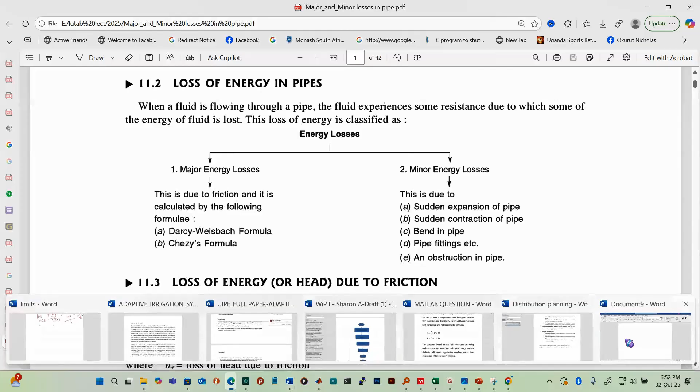So I'm talking about losses in the pipes. We have major losses, and we have minor losses. Under major losses, these are due to friction, and we use Darcy - Darcy-Weisbach and Chezy's formula.

Then under minor losses, we have loss due to sudden expansion, loss due to sudden contraction in the pipe, loss due to fittings, the bends, and obstruction, etc.

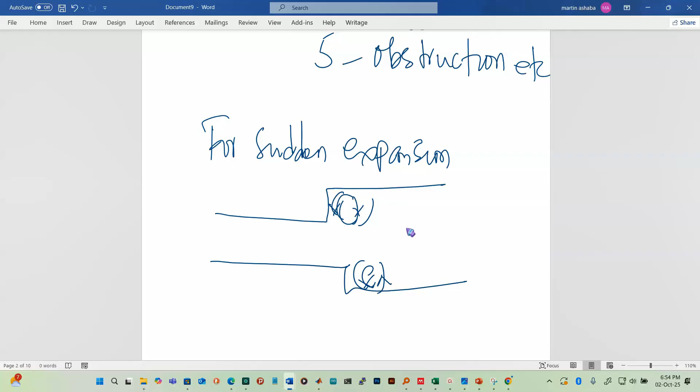Now for sudden expansion, you have a pipe coming smaller, then it suddenly expands. When it suddenly expands, it creates what we call eddies - the swirling of the fluid rotating around and falling back. These eddies result into what we call head loss, called head loss due to sudden expansion.

After these losses, finally the fluid will follow its normal profile - this is the flow direction. Then when we talk about sudden contraction, it is just the reverse of this: you'll have a pipe coming big, then it suddenly reduces in dimensions.

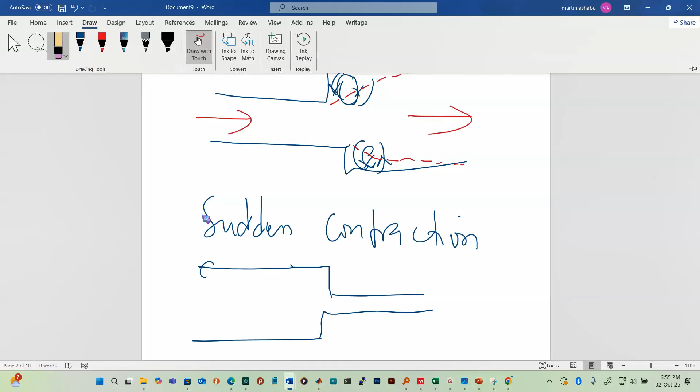So let me redraw this. Because of the eddies, because of this obstruction, the fluid will hit here and then falls back. So somehow it creates what we call a vena contracta. Around here you have what we call eddies - these are eddies, and you also have eddies here. This is the direction of flow.

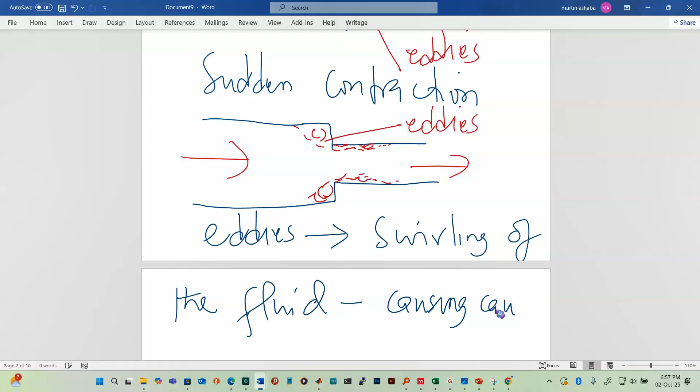So the eddies come from the swirling of the fluid, causing flow to rotate around here, causing rotational flow, which further leads to losses.

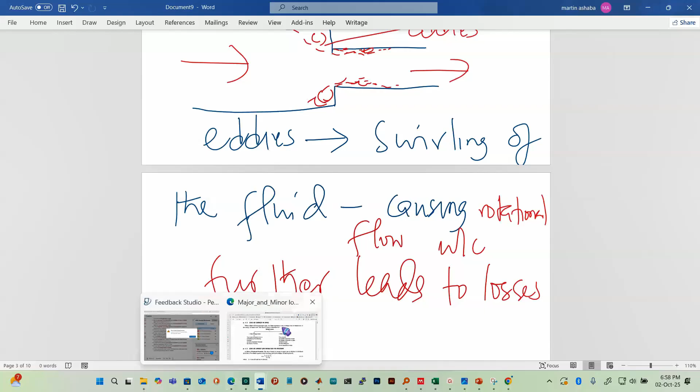We shall later see how to calculate the head loss due to sudden expansion and head loss due to sudden contraction. In studying this, we'll basically talk about heads, because application of Bernoulli's equation gives us the heads of the fluid. Energy is represented in terms of heads of energy - how much energy the fluid carries from point to point is experienced in terms of H, in meters. Later you can convert it into joules and also watts.

So let's look at the loss of energy due to friction, and look at the Darcy-Weisbach formula. It is given by HF, the head loss due to friction, equivalent to 4 times F times L times V squared divided by D times 2G.

So we are talking about Darcy-Weisbach, which gives us the head loss due to friction, given by HF equals 4 times F times L times V squared divided by D times 2G.

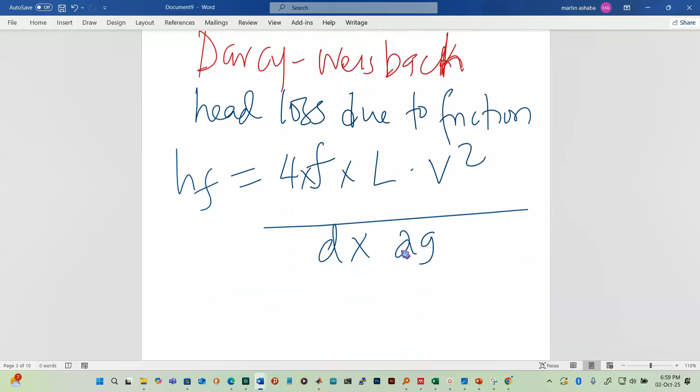So that means we can be able to obtain the head loss if we are given the length of the pipe. So L is the length of the pipe portion.

F is what we call the friction factor. And this friction factor is a constant for a given pipe material, such as HDPE, GI, PE, PVC, and GI. But also these are defined by other factors that could determine this friction factor, but in most cases it depends on the plastic material or the material of the pipe itself.

We can look at maybe, let me get one here. So we can say friction factors.

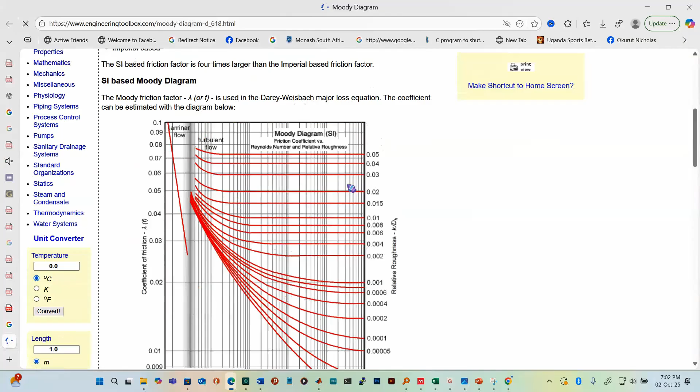So we will look at what we call Reynolds number. Reynolds number, in most cases, is just a dimensionless constant that is used to determine whether the flow is either turbulent or laminar. It gives us a ratio of the inertial forces to viscous forces, and that's what we use to predict whether the flow is going to be laminar or turbulent.

So let me check here. Let's see.

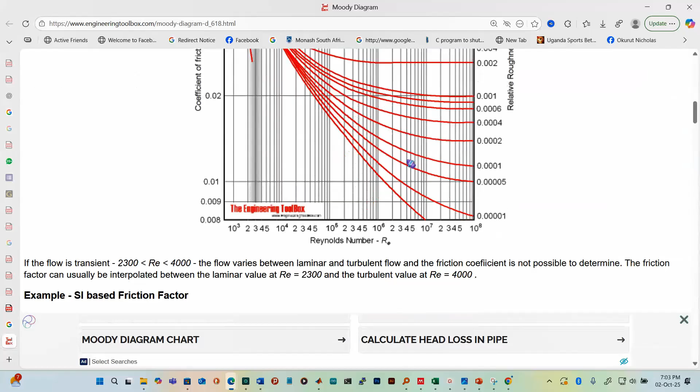When you check on this graph or chart, if, for example, you want to determine the friction factor, you will first have to look at the Reynolds number. If the Reynolds number is in powers of 10 to the power 3, then it will be between this and that. So this is likely to be, let us say, maybe 3,000. Let us maybe take 5,000, something like that.

So you move, and if you move, you will find that this flow is a turbulent one. And then you're supposed to look at the horizontal line. The horizontal line is actually what is giving you the coefficient of friction.

Then the roughness is actually what was given by some constant divided by the diameter of the pipe. So the value that you pick on this other side, like now if I was to pick the friction factor for this from 5, I would move up.

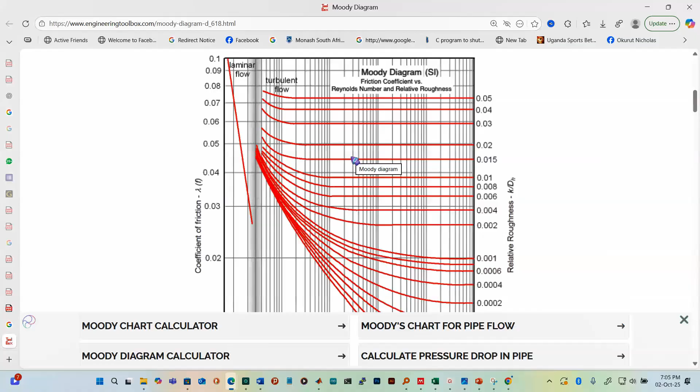So let's go back. So that is exactly what we use. And then L is known, V is the fluid flow velocity, and D is the diameter of the pipe, then G is the acceleration due to gravity.

So we can go ahead and say V is flow velocity, D is the diameter of the pipe, and then G is the acceleration due to gravity.

So that one is done. The Reynolds number, as we said, we need to write the Reynolds number.

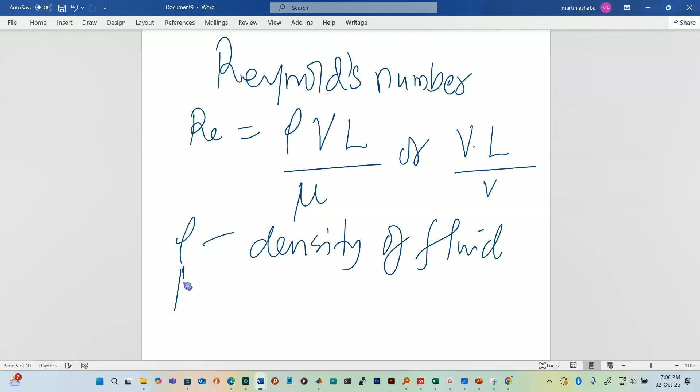So we said the Reynolds number, RE, is given by rho V L divided by mu, or we can also say it is V times L divided by small v, whereby rho is the density of fluid, mu is what we call the dynamic viscosity of the fluid, which determines the ability of the fluid to oppose any shearing forces against that fluid. This viscosity is the internal fluid friction, which determines the capability or capacity of the fluid to resist any shearing forces. Then this small v,

Let me write it properly.

The small v is what we call the kinematic viscosity, and this kinematic viscosity is given by dynamic viscosity out of density of the substance. Then this big velocity, big V, is the velocity of the fluid.

Now, if this Reynolds number is less than 2000, we call this laminar flow. And this is always done for pipe flow, so we can use these dimensions to determine the Reynolds number.

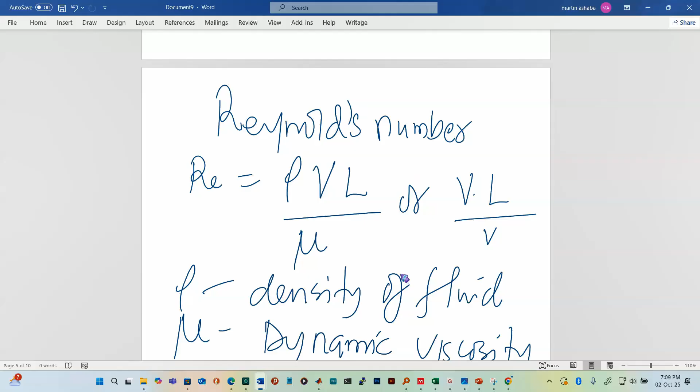Next, if the flow has a Reynolds number above 4000, then we call this turbulent. If the flow is having Reynolds number between 2000 and 4000, then it will have both laminar and turbulent characteristics. So I've talked about that. In the future, if you meet that kind of scenario, just remember what we have said.

So, less than 2,000, then we have what we call viscous flow, but in most cases we call it laminar. If it is above 4,000, then we call it turbulent.

Okay, so let's talk about Chezy's formula. And Chezy's formula is also simple. So let's talk about number 2, Chezy's formula.

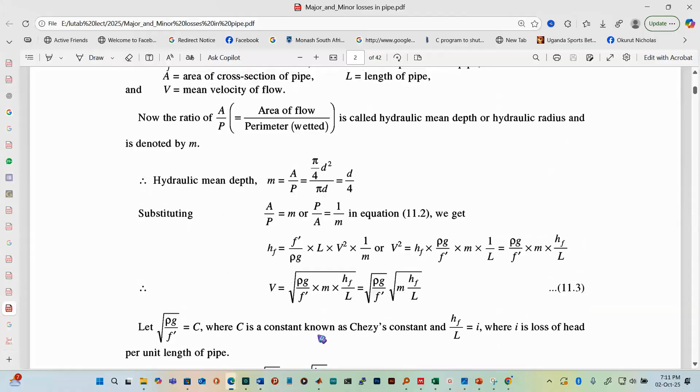This Chezy's formula is none other than HF. It also gives us head loss due to friction in pipes, and is given by HF equals F prime times P out of A.

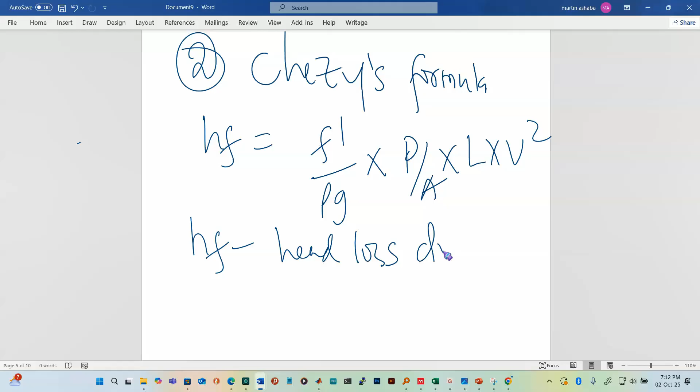So we are saying this HF will equal F prime divided by rho G, multiplied by P out of A, times L times V squared. Now we have to remember that HF is head loss due to friction.

We are saying that Chezy's formula is given by HF, which is equivalent to F prime divided by rho G, multiplied by P out of A, multiplied by L times V squared. And we said HF is the friction head loss, or head loss due to friction.

Next we know that rho G is the specific weight of the fluid. Next is that P is, no, P is not pressure, it is the wetted perimeter. It is called wetted perimeter.

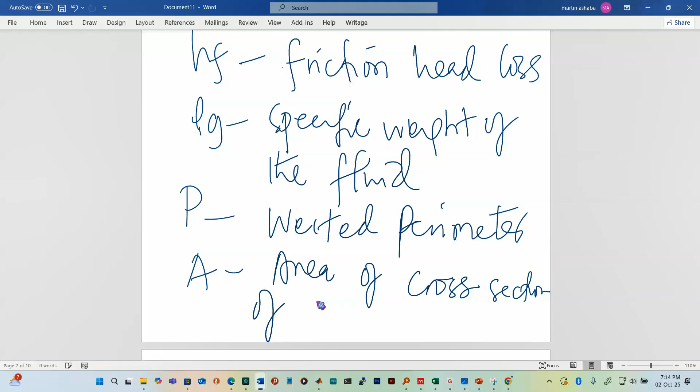Next is that A is actually what we call the area of cross section of the pipe. So L is the length of the pipe.

Now A out of P is what we call hydraulic mean depth, or hydraulic radius, and in open channel flow and in all others we always denote it by M.

So we need to also define this F prime. Any question? No. So we need to define also this F prime. F prime is also a friction factor, but it is calculated by other quantities. I'm trying to find a way how we can calculate that constant.

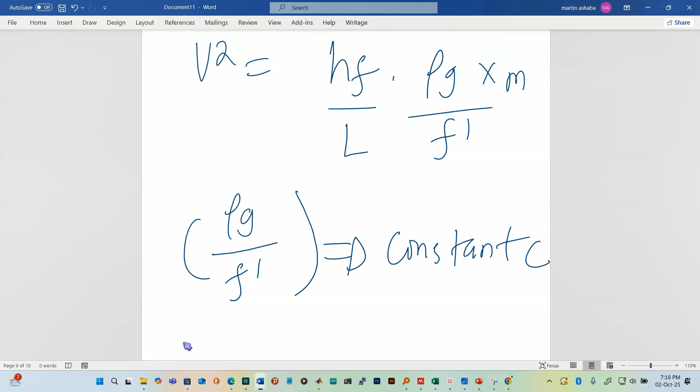We know this rho G out of F prime is actually going to be a constant C, which we call Chezy's constant.

And then this component HF out of L is equal to I, and this is given by head loss per unit length. So this becomes head loss per unit length of the pipe.

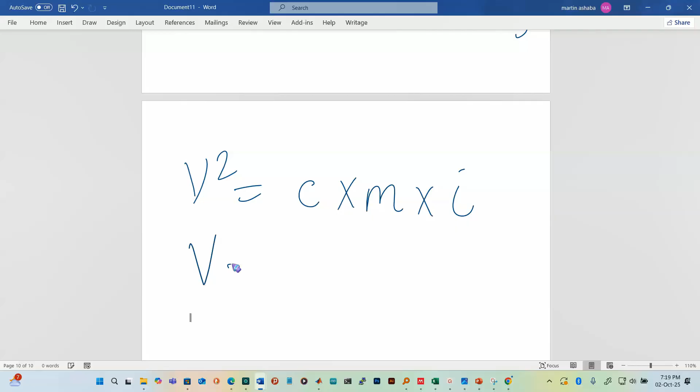And finally, if we know that V squared is equal to C times M times I, then that means V is going to be the square root of C times square root of M I. So this is still a constant C, and therefore we can say... let's create more space here.

So finally, what we call Chezy's formula. Chezy's formula is V equivalent to C times square root of M I, whereby M we called hydraulic mean depth, which is equal to some value. And that value is wetted area over wetted perimeter, so area of cross section over wetted perimeter.

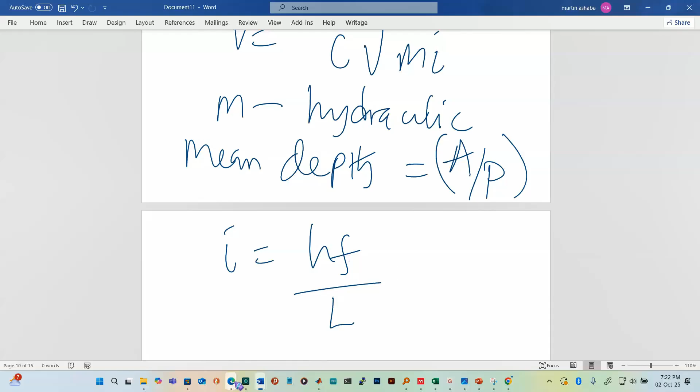So from here, look at this example. Find the head loss due to friction in a pipe of diameter 300 millimeter and a given length, through which water is flowing at a velocity of 3 meters per second. Using that formula, you would use 4 times F times L times V squared divided by D times 2G.

So in this formula, they want you to use V, which is the kinematic viscosity. If you are to use it, you would need to calculate what we call the Reynolds number, and after getting the Reynolds number, you can get the F. Anyway, this was given here.

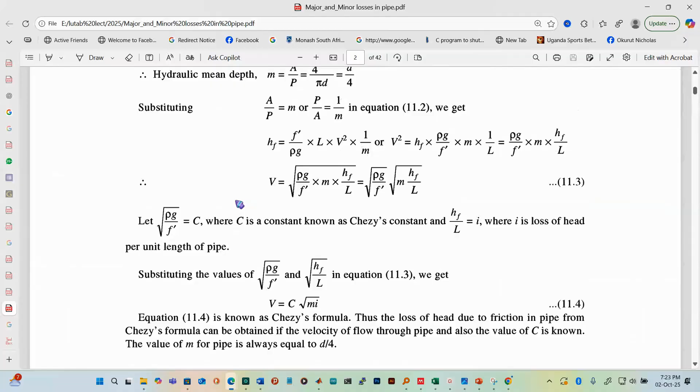Yeah, so if you calculate the Reynolds number, you would see if it is less than 2000 or not. Like here, you can see it is greater, so that means you would use this formula here. Maybe I can repeat that.

Okay, so sometimes this F is given on a graph, like a Moody chart, like we saw earlier. But sometimes you may need to use numerical values, the analytical formula, to calculate that F. So let's note that for analytical values of F, we use F equal to 16 out of RE for RE, or Reynolds number, less than 2000.

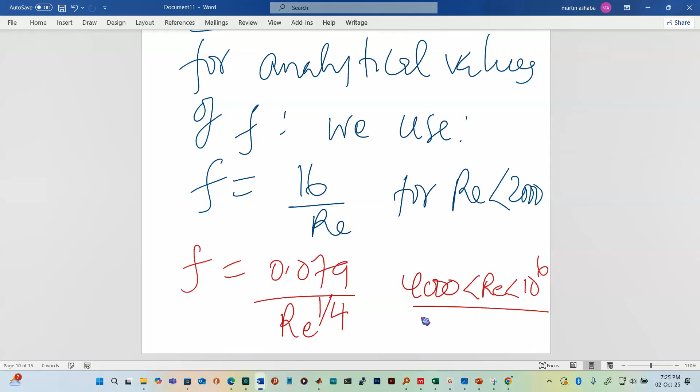Next, if it is above 2000, then F would be 0.079 divided by Reynolds number to power 1 out of 4. That means for a Reynolds number between 4,000 to 10 to power 6, we use this. So for our problem, you can see that when you calculate the Reynolds number...

V times D divided by V, this small v, or what others call nu. The stokes unit is what we use for kinematic viscosity, but we also use other units, meters per second, I mean square meters per second. One stoke is actually equivalent to 1 times 10 to the power negative 4. So if we have 0.01 stoke and want it in standard units, we multiply by 1 times 10 to the power negative 4, and we have it in square meters per second.

So after getting this, what we are calling the Reynolds number, we are able to determine whether it's less than 2000 or above. Then we will be able to determine which formula of F to use. You can see here it's a very big value, so we are using this formula to get this F. That is the F we are going to use in the Darcy formula, Darcy-Weisbach formula, and then we will be able to get 0.7828 meters.

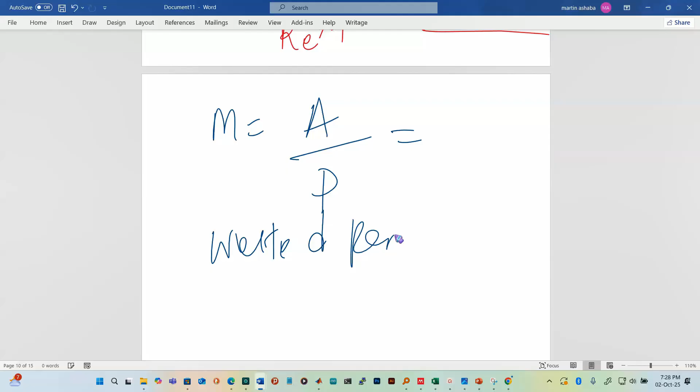Yeah, so what we are going to do is we know that M is equal to A out of P. So for a pipe that is flowing full, the perimeter, wetted perimeter, will equal to the circumference.

The circumference will be 2 pi r, which is pi d. The area of cross section is pi d squared out of 4. So M will be pi d squared out of 4, divided by pi d. What does that mean? I'm going to cancel this and that, pi and pi will go, so I'll have d out of 4. So our M will equal d out of 4.

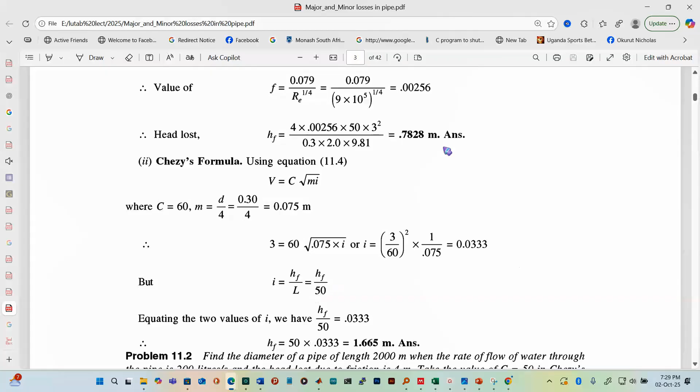So finally, what we would get, we are looking at Chezy's formula. Like here we didn't have it, so we are calculating, we are looking for it actually. Let's go here. We go ahead and say this is 0.3 divided by 4, so we have 0.075 meters.

So we have V, which is C, times square root of HF divided by L, times 0.075.

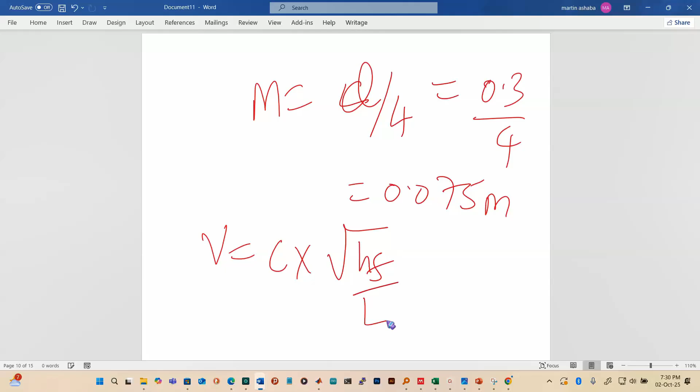So what we are going to do is look for this C. We already know that C is given to us as 60. So then we just have to substitute in. C is 60, and then V is also given. V is 3 meters per second.

So from here you just say V squared out of C squared is equal to HF divided by L times 0.075. Because for us to get this HF, we just have to square both sides. So when you square both sides, this will also carry a square, and this will also carry a square. So we'll have V squared out of C squared, 3 divided by 60 squared, then we multiply by 1 out of 0.075 to get HF, so we multiply. We can leave it under that.

That means HF will be 9 out of 3600 if I square this, times 1 out of 0.075, times L. L is given to us as 50. So from there you can get your value as 1.665.

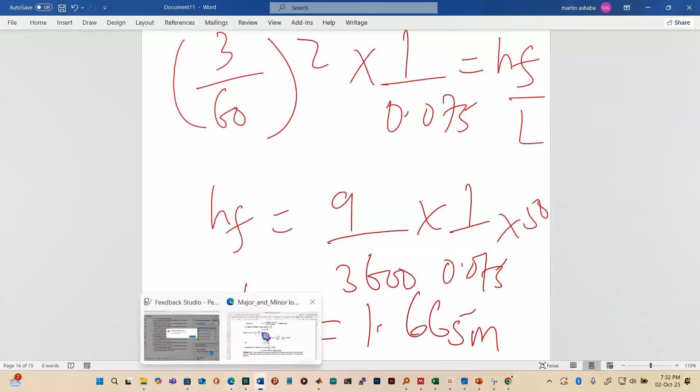So you can go ahead and try out these questions. They are really so direct, okay, they are so direct.

Probably what we could have missed out was the formula for Reynolds number. So L is the characteristic length, but this is the same as pipe diameter. So if you find, let me note that, Reynolds number is equal to rho times VL, divided by mu. L is the characteristic, what we call the characteristic length, which can even be pipe diameter. So if you find Reynolds number as rho VD out of mu, don't ask yourself why.

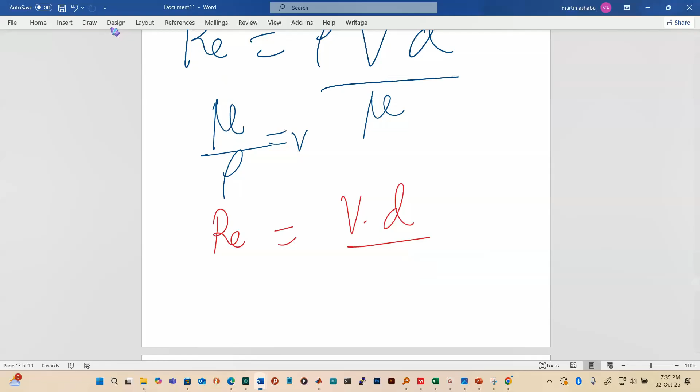Obviously this will continue, you remember we said mu out of rho is equal to small v. Let me create more space here. Then Reynolds number will be V times D divided by small v, which other people call nu, so divided by nu.

So that is it. Try out these numbers, they are all about calculating major losses.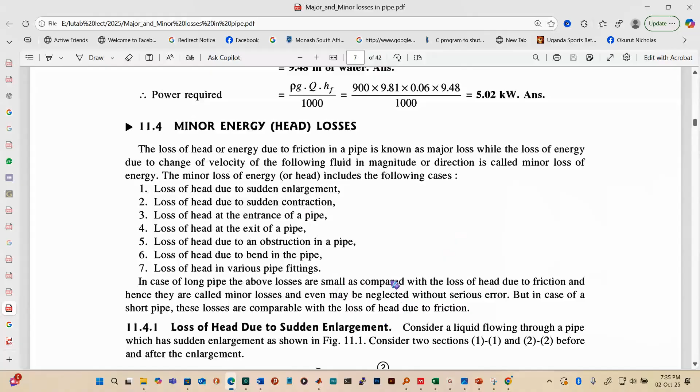So let's talk about the minor energy head losses, which is the main aspect that we need to discuss tonight. Maybe before that, let me see.

If you're calculating the head loss, in this example, they are saying an oil of specific gravity 0.9 and viscosity 0.06 poise is flowing through a pipe of diameter 200 millimeter at the rate of 60 liters per second. Find the head loss due to friction for a 500 meter length of pipe, and find the power required to maintain this flow. Maybe we can try this before we go to the other.

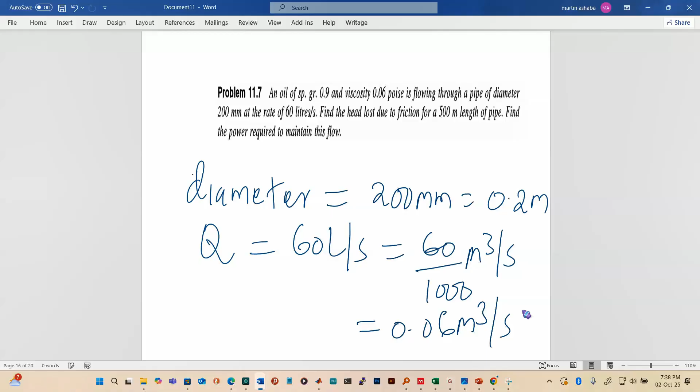So we are told that an oil of specific gravity 0.9 and viscosity 0.06 poise is flowing through a pipe of diameter 200 millimeter at a rate. So we have a pipe which is 200 millimeters, and this is the same as 0.2 meters. Then Q, which is the flow rate, is 60 liters per second, and this is the same as 60 divided by 1000 cubic meters per second, which gives us 0.06 cubic meters per second. Then we are to get the viscosity and convert it, so that viscosity mu is 0.06 poise.

So if it is in poise, I remember we said that 1 poise is equal to 1 Newton second per square meter divided by 10. So 10 times a poise will give you 1 Newton second per square meter. That is the conversion you can do for dynamic viscosity.

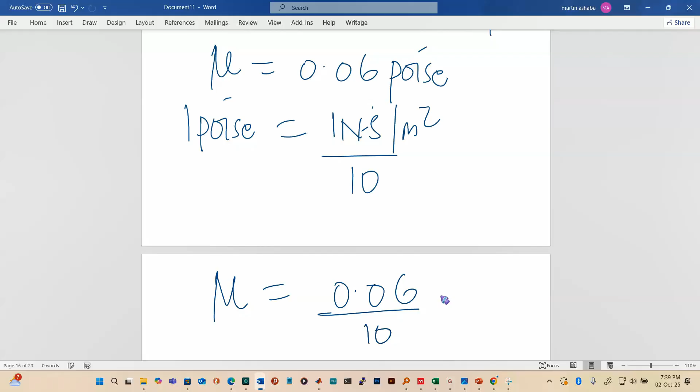So for us to get this value in Newton second per square meter, which are the standard units, our mu will be 0.06 divided by 10, which gives us 0.006. So this mu will be 0.006 Newton second per square meter. This is what everyone should be aware of by now. If you cannot convert the units, then it becomes a little bit hard for us.

So what next? Find the head loss due to friction. The length that we are analyzing is 500, so L is equal to 500 meters, the length of pipe that we are analyzing.

Here we can see you can use any method, but what is favorable here is the Darcy-Weisbach. So using the Darcy-Weisbach formula, where HF is equal to 4 times L times V squared times F divided by 2G times D.

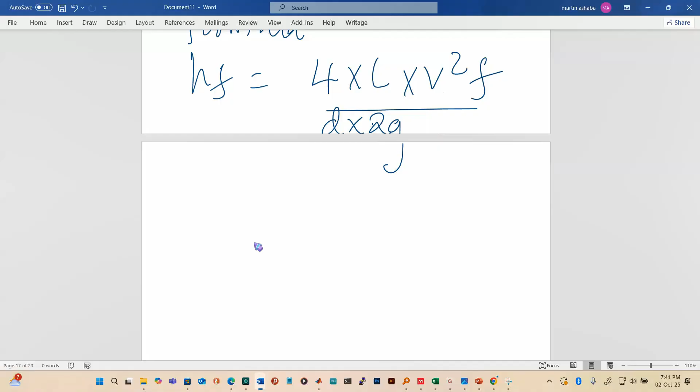Reynolds number, first of all, is given by rho times V times D divided by mu. So this is going to be, we know the density, because we have specific gravity. Let me put it here.

So density will be specific gravity times 1,000. Everywhere you see specific gravity is 0 point something, multiply by 1,000, and then you have it in kilogram per cubic meter. So this will be 0.9 times 1,000, giving us 900 kilogram per cubic meter. So we're going to put it down here.

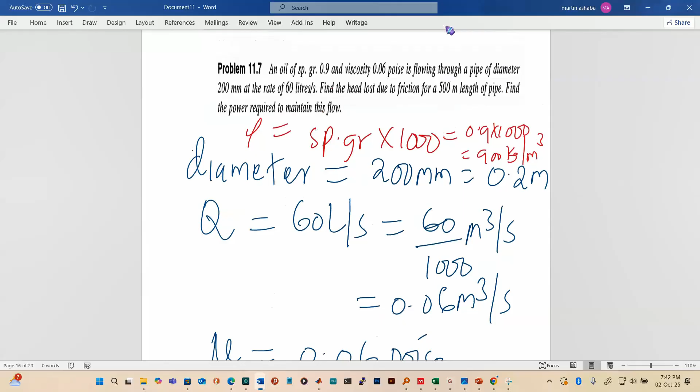So we are going to have Reynolds number as 900 times V. If the V is not given, then we look for it. Here, again, we shall use what we call the continuity equation. Times V times the diameter, the diameter is given as 0.2, and then the 0.006, which is mu.

So our task is to get V. We know Q is equal to, so from Q is equal to VA, this is continuity because this is flow in a pipe. So those equations, the Bernoulli's equation, then continuity, all those two equations go hand in hand with each other. So in most cases, if they give you flow rate, and we are talking about flow in a pipe, and you don't have velocity, you have to use the continuity equation to get it.

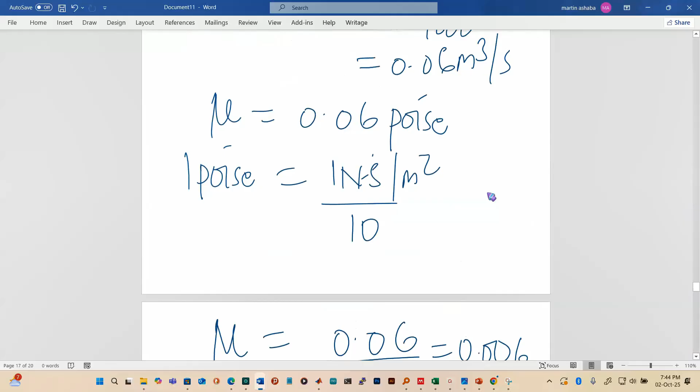So let's get it. So V will be Q divided by A. Q is already given, we have it as 0.06. So 0.06 divided by A, which is pi times D, which is 0.2 squared, divided by 4. So V, I can see we have 1.91 meters per second.

So we bring it in here, we will have RE, which is the Reynolds number, and that will be 900 times 1.91 times 0.2 divided by 0.006, which is mu. So RE is giving us something like 57300. This means this value RE is greater than 2,000.

So meaning F will be 0.079 divided by RE to power 1 out of 4. These are formulas that have to stick in our mind. So 57300 to power 0.25, because a quarter is the same as 0.25. And F, therefore, is 0.0051.

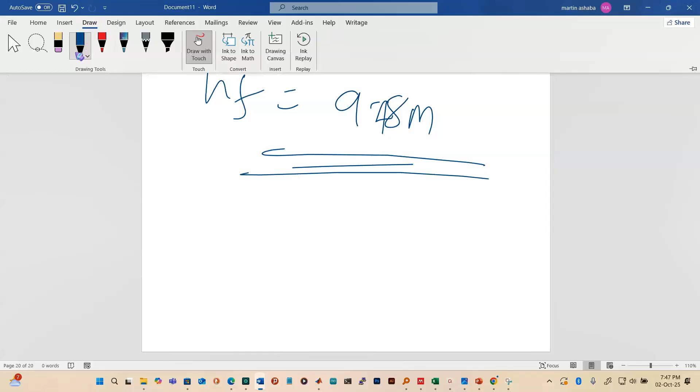So we are going to talk about power required. The question wanted us to find the power required to maintain this flow. As you see, there is head loss due to friction. Therefore, the system must spend some power or some energy to maintain this flow. So the question is asking us the power required to maintain this flow. And how is it going to be spent? Via a pump. We are going to be supplying the energy to the pump to maintain this flow.

So we know that power, first of all, is equal to energy out of time, the energy transferred in a unit time. Here, the energy that is going to be discussed is basically the potential energy, and it's this potential energy transferred over this time that results into the power that is going to be spent. So what we can do is say we shall have the mass out of time times gravity times h.

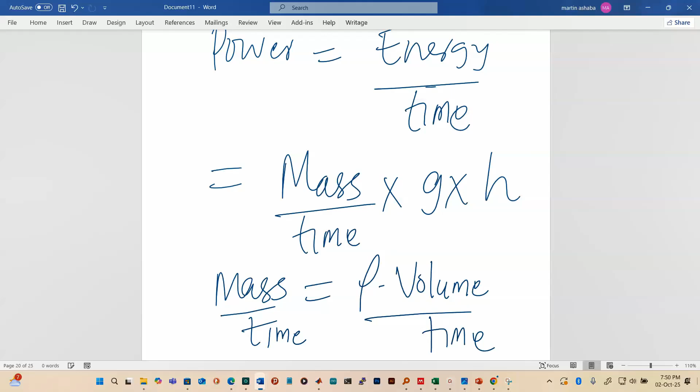So what is mass? Mass itself is equal to density times volume. But remember, this is mass out of time. So if we put this out of time, then volume out of time itself is flow.

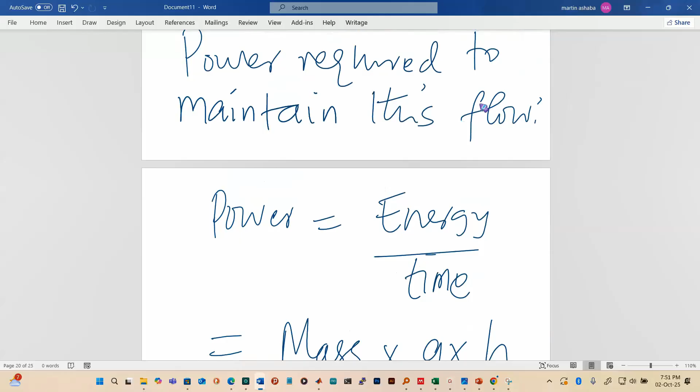Good. So that means the whole of this formula, power, will be rho times Q times G times H, which is now HF. So for that matter, this will be 900 times flow, which is 0.06, times 9.81, times HF. Because this energy is to overcome the friction and also move this fluid.

So since we are spending energy on friction, then we shall use the head loss due to friction here. So we shall multiply by this, which is 9.48. So if we divide it by 1,000, then we shall have it in kilowatts. So finally, this power becomes 5.02 kilowatts.

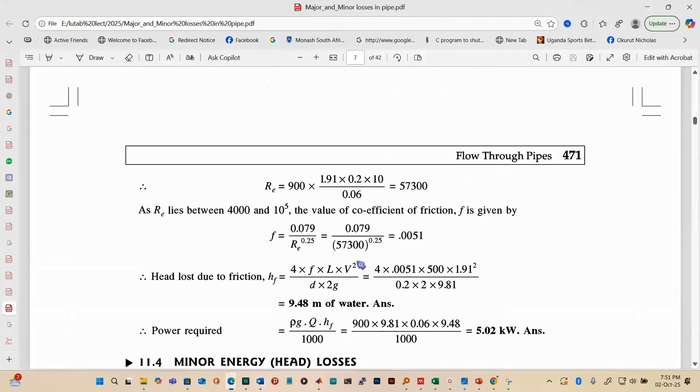Okay, so this is what actually I wanted us to understand. In the future, if they ask you to determine the power that you're giving to the pump, it is always going to be rho times Q times G times H, whereby H is the head the pump is overcoming. If you divide it by 1,000, you're converting it to kilowatts. I repeat, if they ever tell you to determine the power required by the pump, then it will be the density of the fluid times the flow rate of the fluid times the head the pump is going to overcome times the acceleration due to gravity. If I divide it by 1,000, I'm converting this to kilowatts. If I leave it without dividing by 1,000, then it will be in watts.

So let's look at minor energy losses, and basically here we are going to discuss the loss of head due to sudden enlargement. So let me copy this.

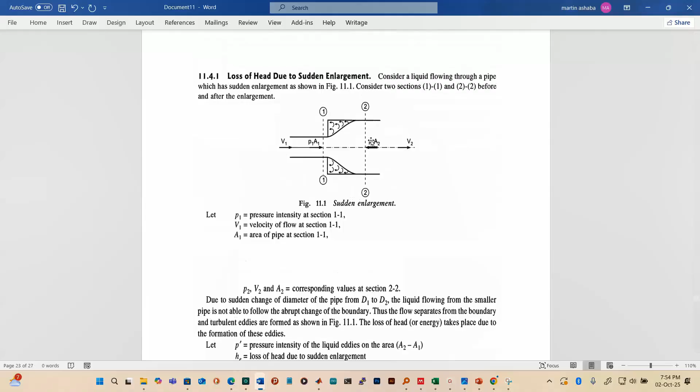Now, loss of head due to sudden enlargement, we earlier on talked about it and we said that this is part of the minor losses. So as there is a sudden change in pipe dimensions, we happen to create what we call eddies. It is these eddies that lead to head loss. There is a swelling of the fluid here, falling back and forth, so there is energy dissipation around these areas, and it's what actually results into head loss.

Now, when we take assumptions of a control volume, we realize that when fluid is flowing from this end and coming out from this end, the control volume is in between 1 and 2. So as it is exiting, there is a force that is going to be acting on it. When we refer to the dynamics of a control volume, you'll find that this force due to pressure at point P2 is going to be acting in opposition to the force due to pressure at point 1. That's why you always find that force is equal to pressure times area: F at 1 is equal to P1A1, and force at 2 is equal to P2A2. So these forces are opposing each other, and the explanation is just from the dynamics of a control volume. All forces are always going to be acting towards the control volume.

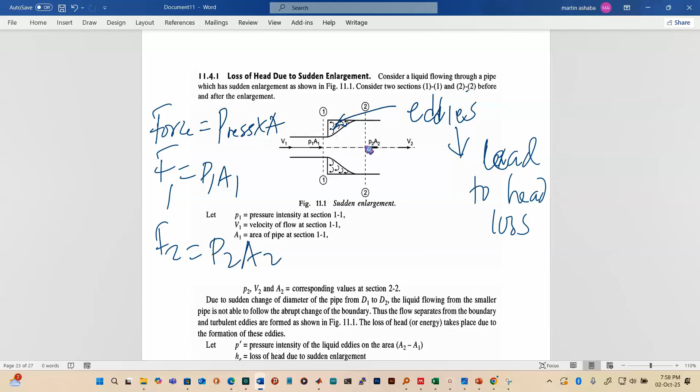Due to the sudden change of diameter of the pipe from D1 to D2, the fluid flowing from the smaller pipe is not able to follow the abrupt change, so turbulent eddies are formed there. The pressure between section 1 and 2, at the point where the eddies are formed, is not going to be the same - so it is called P prime. The eddies occupy an area of A2 minus A1, since the bigger diameter is A2 and the smaller diameter is A1, and the pressure acting there is P prime.

Now HE is the head loss due to sudden enlargement. From Bernoulli's principle, for a real fluid flow, P1 divided by rho g plus V1 squared over 2g plus Z1 equals the right hand side, where losses are always added. So we have P2 divided by rho g plus V2 squared divided by 2g plus Z2 plus loss due to sudden enlargement. Since the pipe is horizontal, this is an assumption, so we eliminate Z1 and Z2.

Therefore P1 divided by rho g minus P2 over rho g - let me combine that - P1 minus P2 out of rho g. This is equal to V2 squared minus V1 squared out of 2g plus HE. I call that equation 1, since Z1 and Z2 have cancelled out. So we need HE, let's take it further: HE is P1 minus P2 out of rho g, plus, when negative V1 squared crosses the equal sign it becomes positive V1 squared, minus V2 squared, since that was positive it becomes negative, divided by 2g.

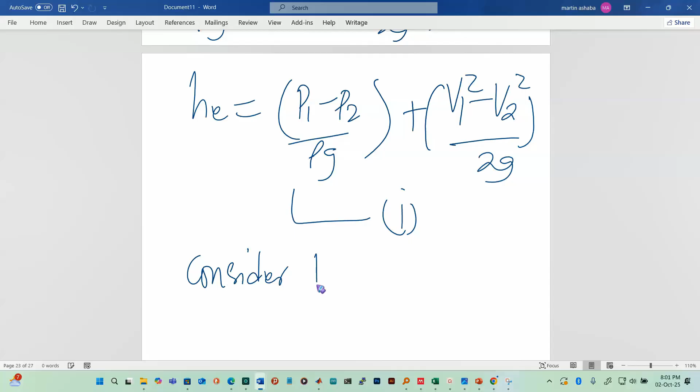Now we can call this equation I. What next do we need to look at? We also need to look at the force, so we shall consider the control volume between 1-1 and 2-2. Between 1-1 and 2-2, the resultant horizontal force acting on the control volume, let's call it Fx, will be due to P1A1, the resultant force, so we shall have P1A1.

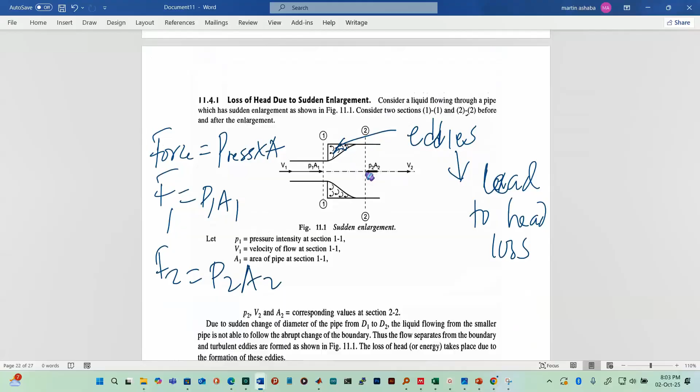We add another force, P prime into A2 minus A1, because A2 is greater than A1, and the pressure that is there is P prime due to eddies. Then we subtract P2A2, because according to the dynamics of the control volume, this force acts in opposition to P1A1. So we shall open brackets here, but before that, experiments show that P prime is approximately equal to P1.

So it's a good approximation, P prime equals P1. So Fx will equal P1A1 plus P1A2 minus P1A1 minus P2A2. Someone very critical can see that now we have some things to cancel - this and that will go away. So Fx will equal P1 minus P2 into A2. We can call this equation 2.

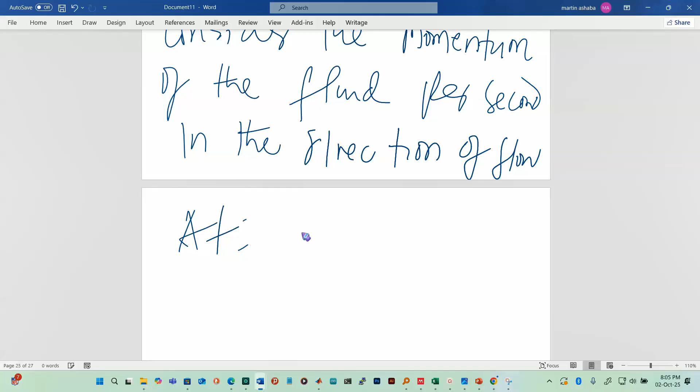So we continue and say also consider the momentum of the fluid per second, in the direction of flow. We can say that at section 1-1, momentum per second is going to equal - we know that momentum is mass times velocity.

Okay, so if we talk of momentum per second, we are dividing by time. But what is mass? We know mass out of time equals rho times volume. Divided by time, this becomes rho times Q, because volume out of time is flow rate. And Q itself is equal to area times velocity.

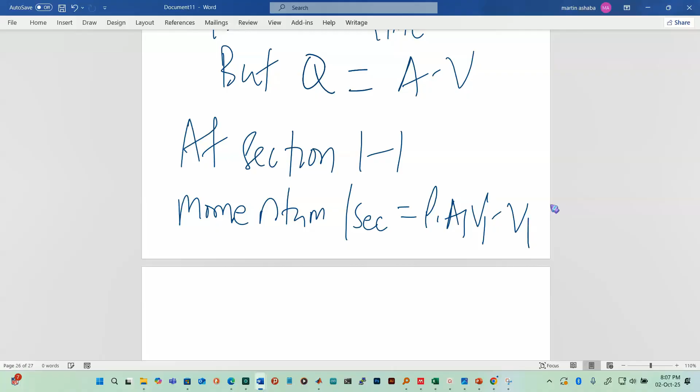So at section 1, the momentum per second will equal, substituting these quantities, density times area A1 times V1, times V1 again, since it's multiplied by velocity. The whole of rho A1 V1 is just mass out of time. So the momentum per second will be rho times A1 times V1 squared.

Likewise, at section 2, momentum per second will be density rho, since it's the same fluid with constant density, times A2 V2 squared.

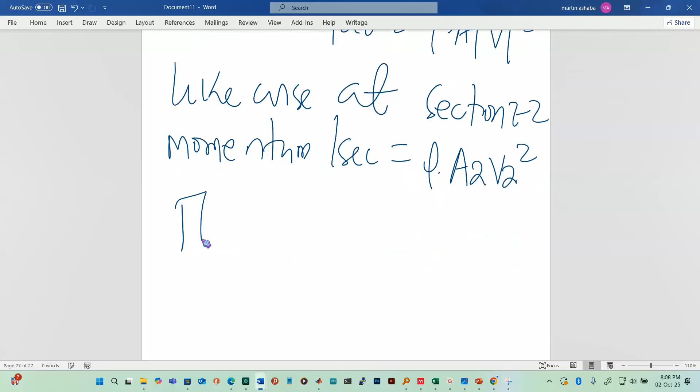And the change in momentum per second will equal rho A2 V2 squared minus rho A1 V1 squared.

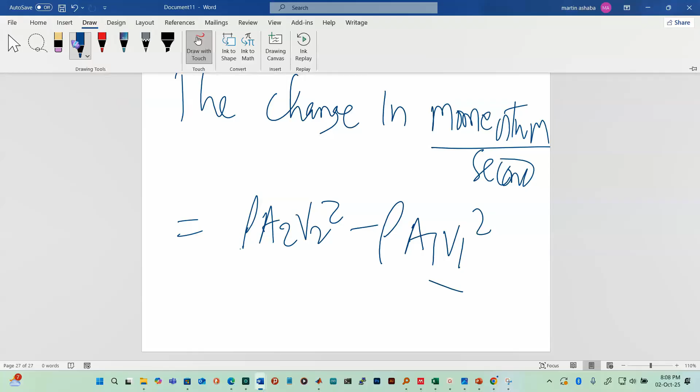So we can create more space here.

So from here we know rate of change of momentum is equal to force, and this is Newton's second law of motion.

So that means the force Fx is also equal to rho into A2 V2 squared minus A1 V1 squared.

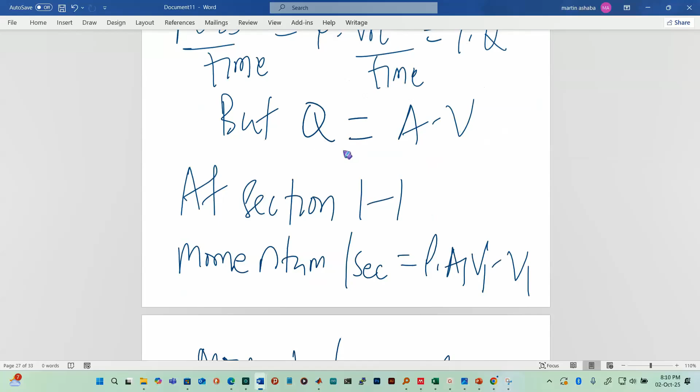So that will tell you I can get P1 minus P2, I divide by rho, okay? And this is equal to A2 also into V2 squared minus, so we can't factorize out the A2. So we can still say this is A2 V2 squared minus A1 V1 squared, divided by A2.

But again, from continuity equation, we know that A1 V1 is equal to A2 V2. So we can eliminate A1 here, meaning A1 will equal A2 V2 divided by V1. So if this was star and this was equation 3, I can substitute 3 into star.

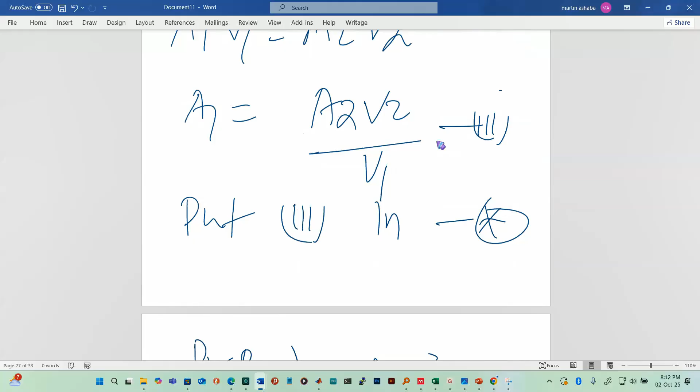So if I bring it in here, I'll have P1 minus P2 out of rho. This will equal A2 V2 squared minus A2, substituting in, times V1 squared, divided by V1. So some things are going to cancel, so this and that go away.

What does that mean? Still, this is out of A2, okay, so this A2, this and that are going away. So what does that tell us? It tells us we will have P1 minus P2 out of rho, which will equal V2 squared minus V2 V1.

V2 squared minus V1 V2. Very good. So can I divide both sides? Divide both sides by G, so what does that become?

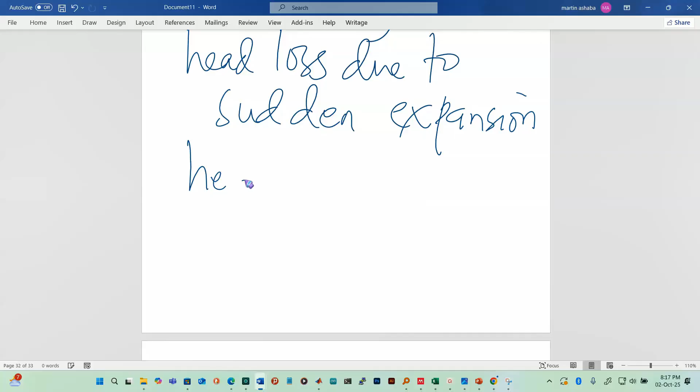Head loss due to sudden expansion, HE, is calculated using V1 minus V2, everything squared divided by 2G. So if this problem is given to you, to prove that the head loss due to sudden expansion in a pipe is V1 minus V2, everything squared divided by 2G, then you start from here, you move, you consider all those concepts, then you conclude from here.

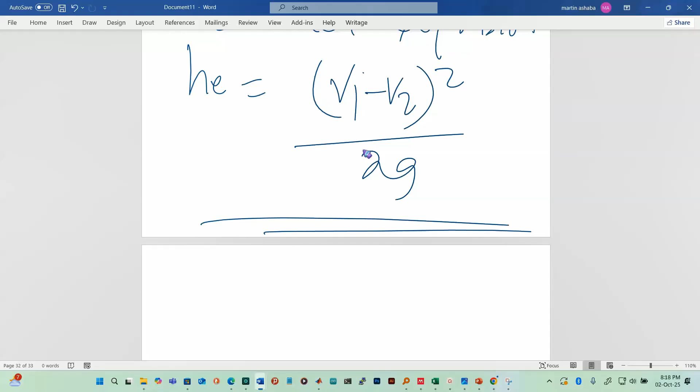Now I want to rush very fast to the expression for sudden contraction, so that maybe some people can ask questions. That is the expression. Now let's look at this.

So this is loss of head due to sudden contraction. Again, as we earlier discussed, sudden contraction means you have a pipe of particular dimensions, and then at a particular point it changes. Here it is changing from high dimensions to lower dimensions, and there is a sudden change. So again you have such kind of arrangement, and you'll have the eddies around this point. And these are the eddies that are going to lead to loss of head.

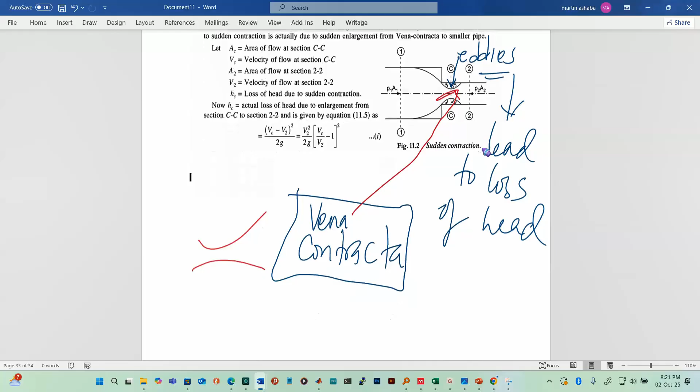Now, when you analyze this, you realize that between CC and 2,2, there is again some kind of sudden expansion, and this is what actually causes head loss. So the head loss due to sudden contraction is actually complemented by head loss due to sudden expansion at the vena contracta.

So if we take area at the vena contracta to be AC, VC to be the velocity of the fluid there, then A2 to be the area at section 2, V2 at section 2, and HC to be the head loss due to sudden contraction, then we shall find that HC is going to be VC minus V2, squared, divided by 2G. So this is similar to the head loss due to sudden expansion.

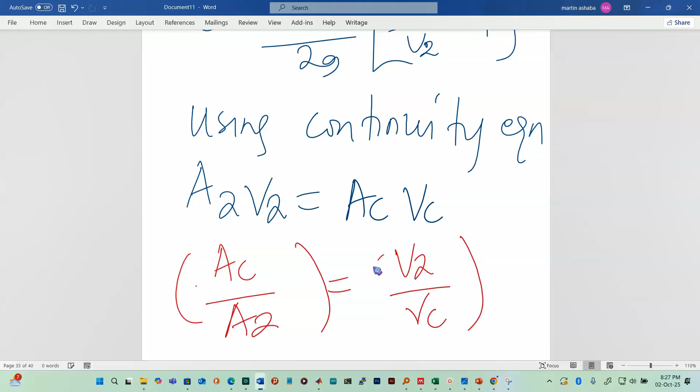So, AC out of A2 is called CC, and CC is called coefficient of contraction. So it is a constant. Therefore, if we bring it in here, this means CC equals V2 divided by VC. That means if we do a little manipulation here, 1 out of CC equals VC divided by V2.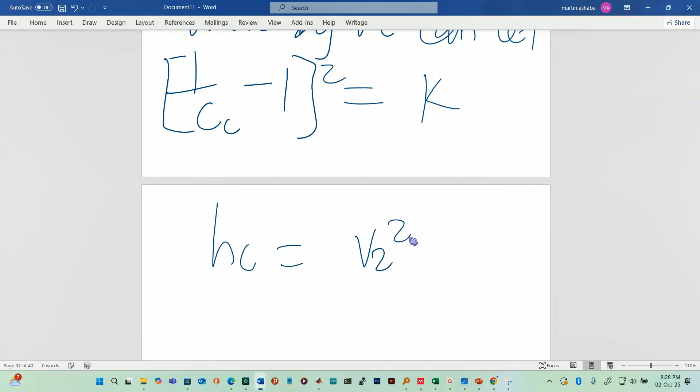So therefore, from this equation, we can say from star, HC will be V2 squared out of 2G into 1 out of CC minus 1, everything squared. So whereby we can let 1 out of CC minus 1 squared equal to K. And therefore HC becomes V2 squared out of 2G times K. So given K, we can determine HC.

Okay, so that's where we are. Now, if we have any problem, let's go back to this other area. You can see if we have our coefficient of contraction to be like 0.62, then K will be 0.375.

Okay, so if the value of CC is not given, the head loss due to contraction is always taken as: if CC is not given, then HC can be calculated from HC equals 0.5 V squared out of 2G, where that is the velocity at point 2.

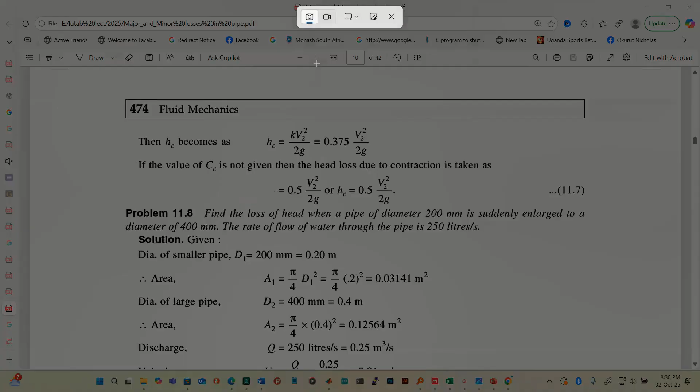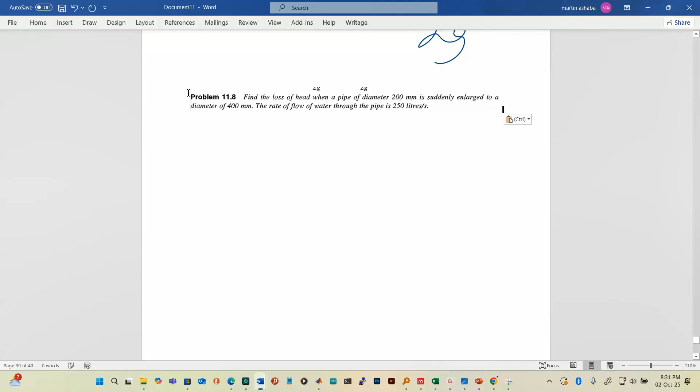So given this question, find the head loss in a pipe of diameter 200. So let me capture this. So we are saying: find the head loss of a pipe. Diameter is 200 millimeter, which is 0.2 meters. This is D1. Then D2 is 0.4 meters. Q is 250 out of 1000 cubic meters per second, making 0.25 cubic meters per second.

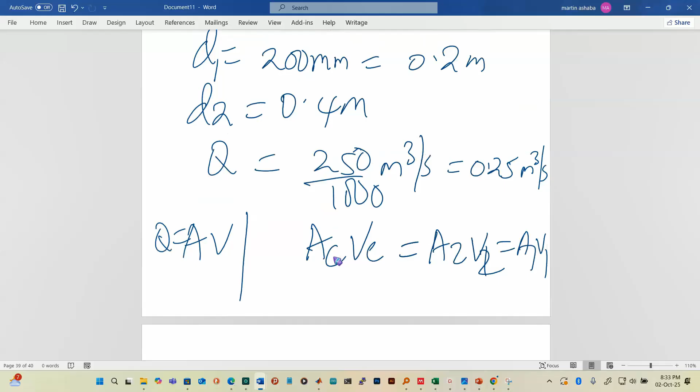So that means we are able to get Q, which is equal to AV, meaning we can as well say AC VC equals A2 V2 equals A1 V1. So we are able to determine the coefficient of contraction. We are able to determine V2, and therefore we are able to compute HC.

So this question is looking at sudden enlargement. So let's do sudden enlargement. So that means the question is just very direct. So we shall say this is 0.2 meters, 0.4 meters. So what is HE? This is V1 minus V2, everything squared, out of 2G.

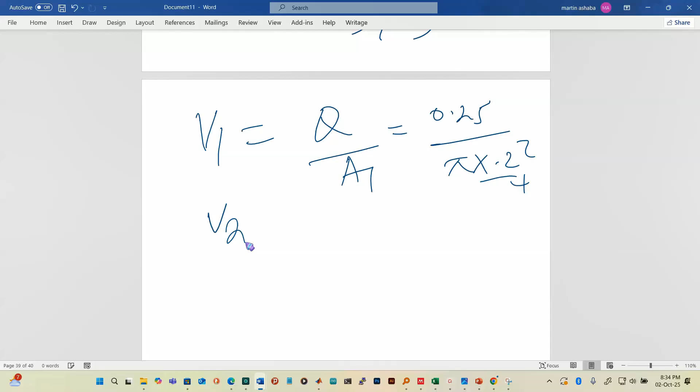So we know that V1 is equal to Q divided by A1, and this is 0.25 divided by pi times 0.2 squared out of 4. Then V2 will be Q out of A2 also, and this is 0.25 divided by pi times 0.4 squared out of 4.

So HE will therefore become what? This is supposed to be 7.96 minus 1.99, everything squared, divided by 2 times 9.81. So HE, when you compute it very well, should give you 1.816 meters. And that's all. So these questions come when they are really very simple.

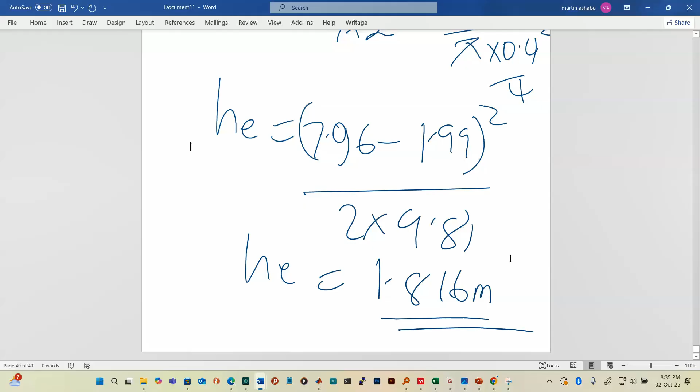Okay, so the next one could be contraction. Let's see if we have one for sudden contraction. Yeah, also here, if they require a power lost due to sudden, so it could have a question: power lost due to sudden enlargement.

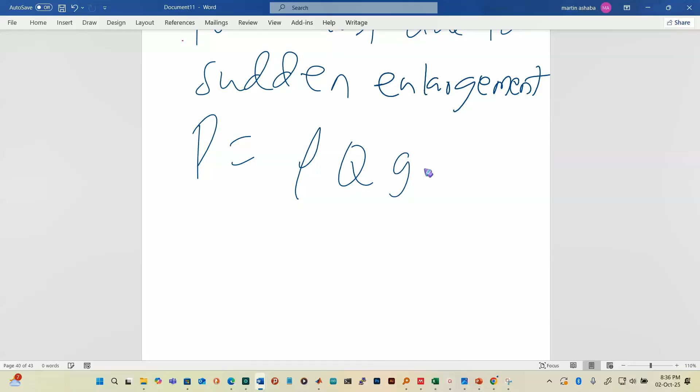Then that power will equal to rho Q, we say G times HE, divided by 1000, this will be in kilowatts. So here you have the 1.816 times 9.81 times the flow, which is 0.25, times 1000, which will be the density for water, divided by 1000. So finally you get your answer. So that power should give you an answer in kilowatts.

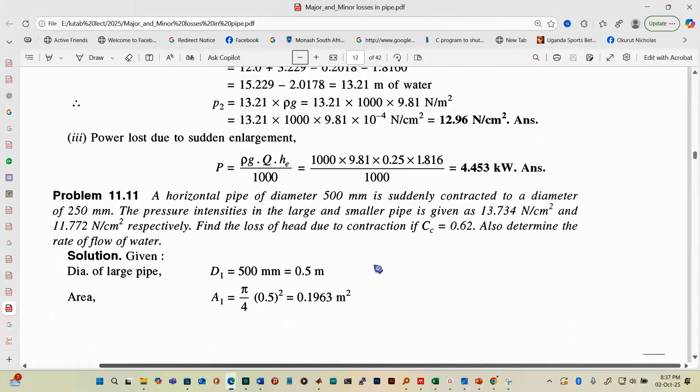For sudden enlargement, sudden contraction, they can give you... let me see this question. Let me check here, I'm seeing some question here. Yeah, you can try out this. A horizontal pipe of diameter 500 millimeter is suddenly contracted to a diameter of this. The pressure intensities in the large and small pipe is this and that. Find the loss of head due to contraction of this. Also determine the rate of flow of water. So here you would now apply Bernoulli's equation, you apply the continuity.

It's as if you're doing it from first principles. You've been given CC, so later on it's just a matter of substitution, and you'll be able to get that answer. So you should be able to get 0.751, and the flow rate should be 268.3 liters per second, or 0.2683 cubic meters per second.